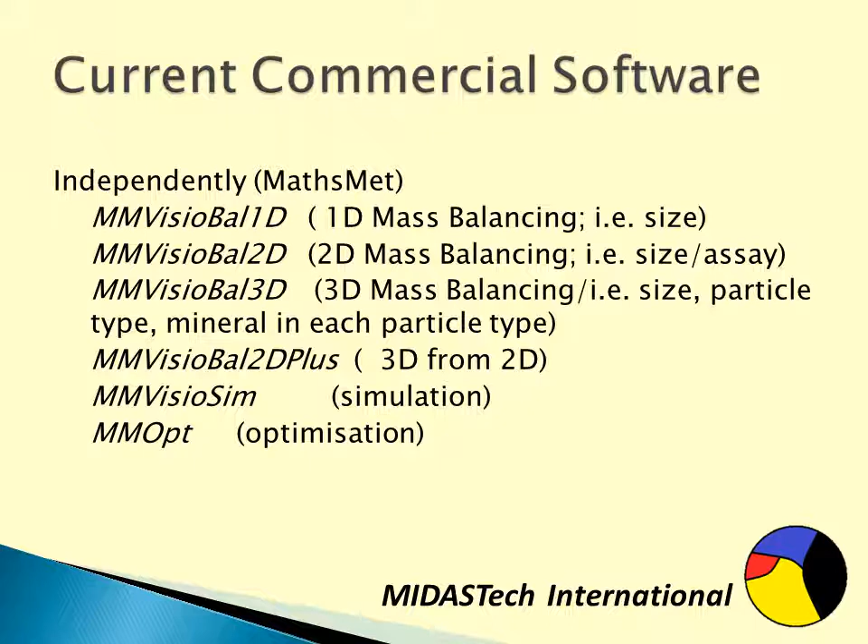And MMVisioSim, which is a simulation system, and there are numerous sub-products which arise from the main products. I do use a Visio flowsheet and interrogate it and put it to an Access database, so that's Visio to Access. And when I use a Visio flowsheet and connect it to Excel, it's Visio to Excel. There's a general flowsheet simulator that we're currently developing in Excel called Excel Sim.

In LinkedIn, you often get the question, and it's generally superficial, what is the best simulator? For which there's often responses which are one-line responses, such as you should use this simulation system or you should use another simulation system. One of my favourite quotes is, you should use such and such because it can do everything. Generally, when I respond to questions like this, I ask people what their requirements are.

What are they trying to achieve? By doing this, I've also come to grips with what I think should be in a simulator. Now, there's lots of criteria for what a simulator should have.

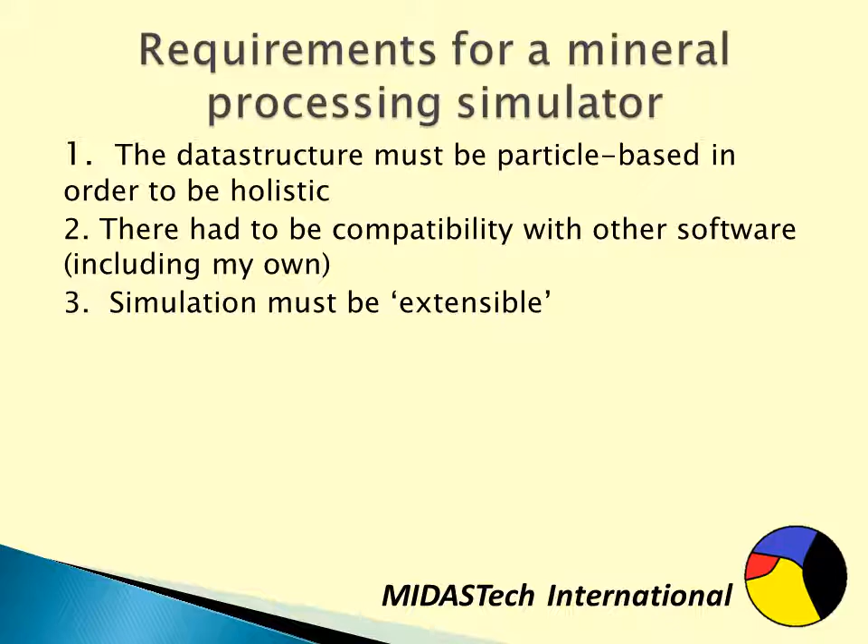And here I indicate what I think are most important if one wants to think of a holistic simulator. The data structure must be particle-based in order to be holistic. There had to be compatibility with other software, including my own. Simulation must be extensible, meaning that users can add their own. One must recognise that simulation is only part of a larger analysis process.

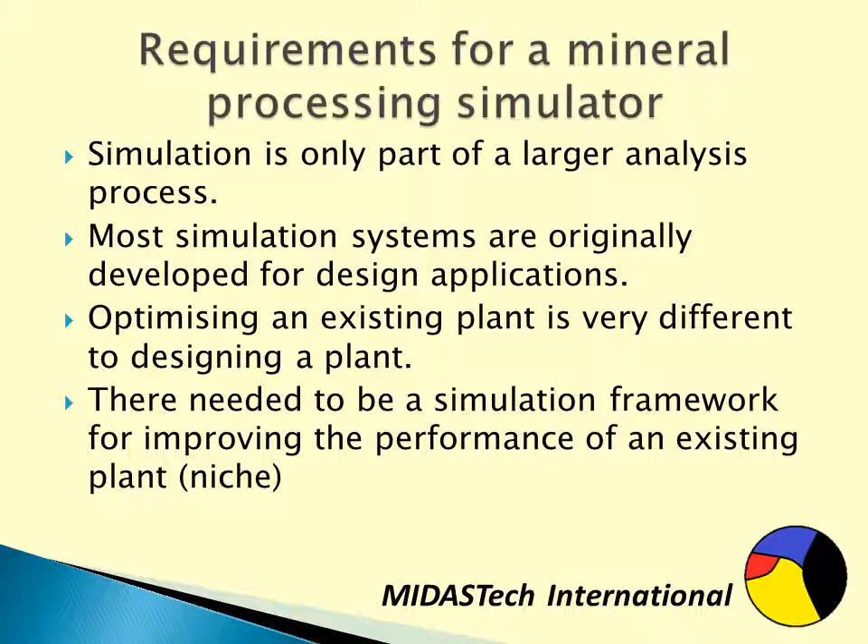Most simulation systems are originally designed for engineering design applications. Optimizing an existing plant is very different from designing a plant, and so there needed to be a simulation framework for improving the performance of an existing plant. And this is the niche market that our company is entering.

I actually did a course in mineral processing, and they run between 5 days or 6 days or 3 days. I've broken it into a fundamentals course and an advanced course. The fundamentals course generally includes knowledge that would be regarded as non-controversial, and in the advanced course I introduce concepts that are effectively way ahead of the status quo.

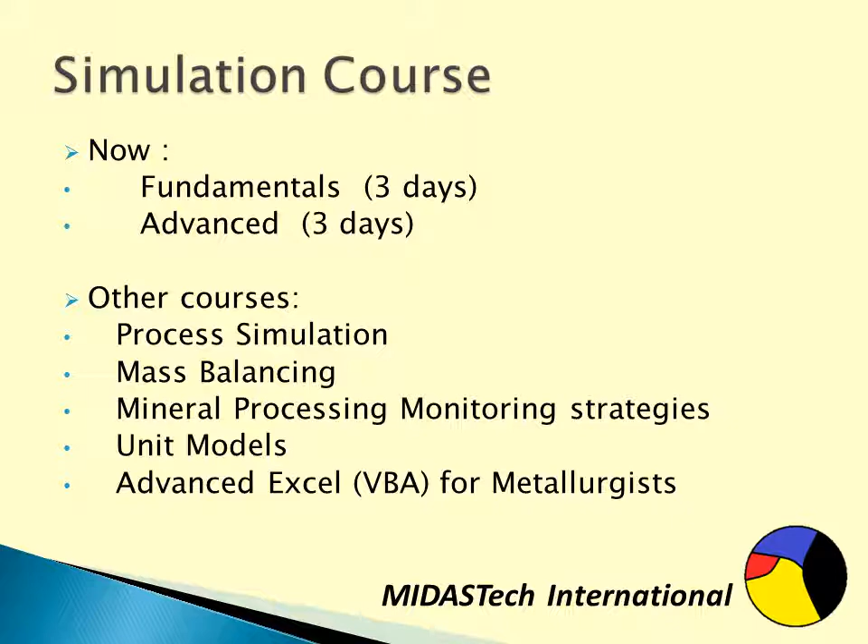There are other courses I give which are derivative courses of the simulation course: process simulation, mass balancing, mineral processing monitoring strategies, unit models, and advanced Excel for metallurgists.

So I've already explained that in order to model a plant holistically, we need to use particles. That's because particles are truly what is being processed by a mineral processing plant. Also, we need to differentiate the ore properties from the unit models.

Hence, the same particle going through the same unit will have the same behaviour. Now, behaviour doesn't mean that if you put it through the same unit once, it goes through the concentrate, and the second time it must go through the concentrate. What it means is that the second time, it has the same probability of going to the concentrate. So we see there is an association between behaviour and probability, and more importantly, a strong connection between mineral processing simulation and probability theory.

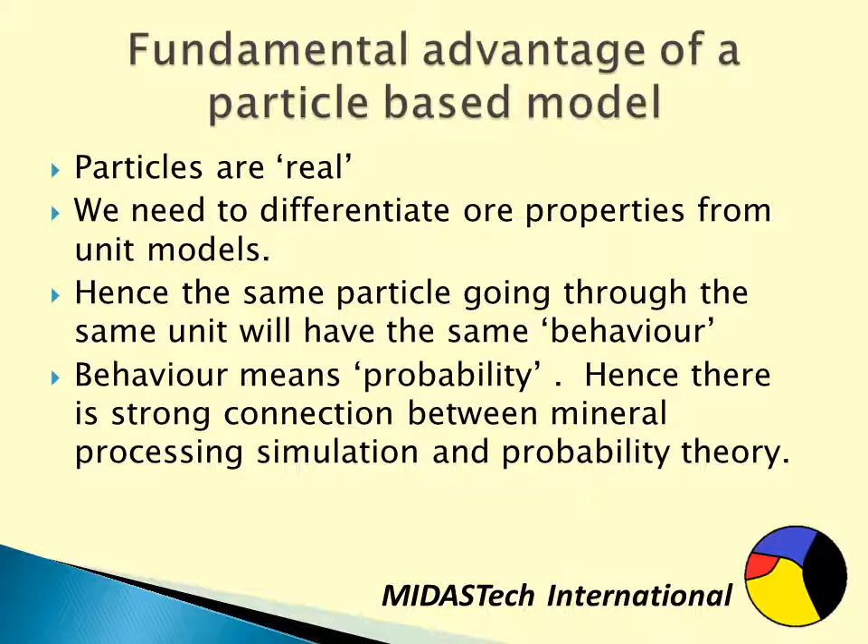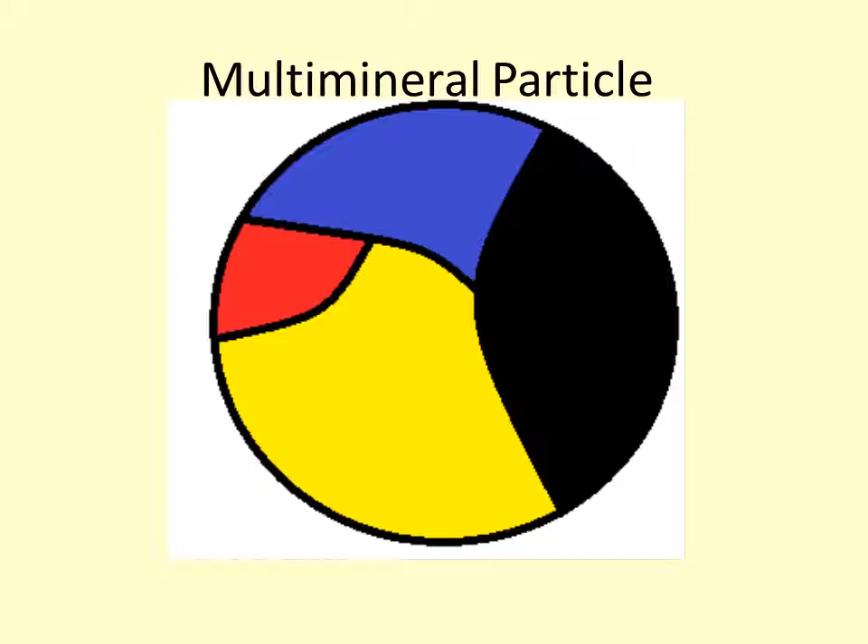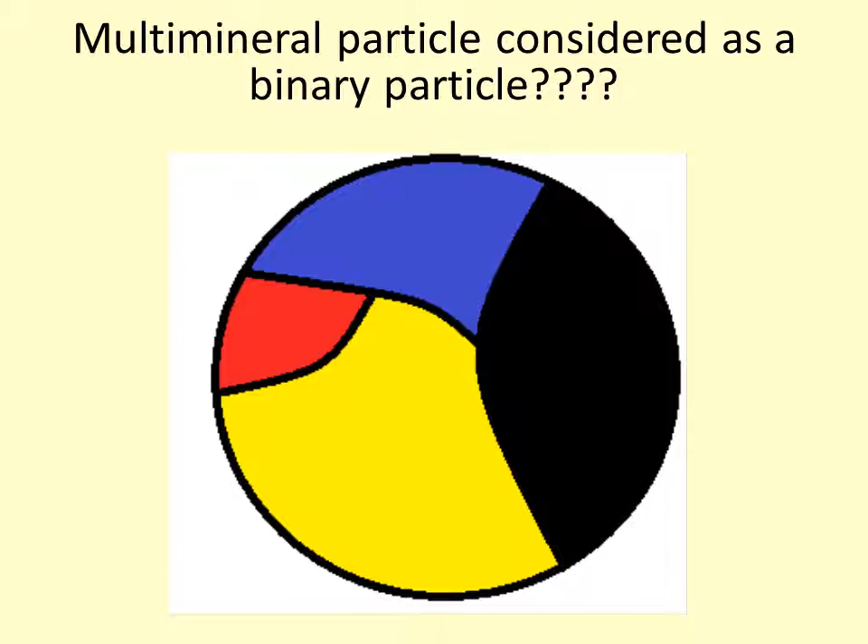So for complex ores, it doesn't seem very sensible to use any other data structure than multi-mineral particles. This is largely where existing mineral processing simulation systems have become stuck, because at best they know how to model binary particles and they don't really know how to treat multi-mineral particles. In the course, I provide the mathematical framework by which the extension to multi-mineral particles is not difficult. It just takes a little bit of time to understand the concept.

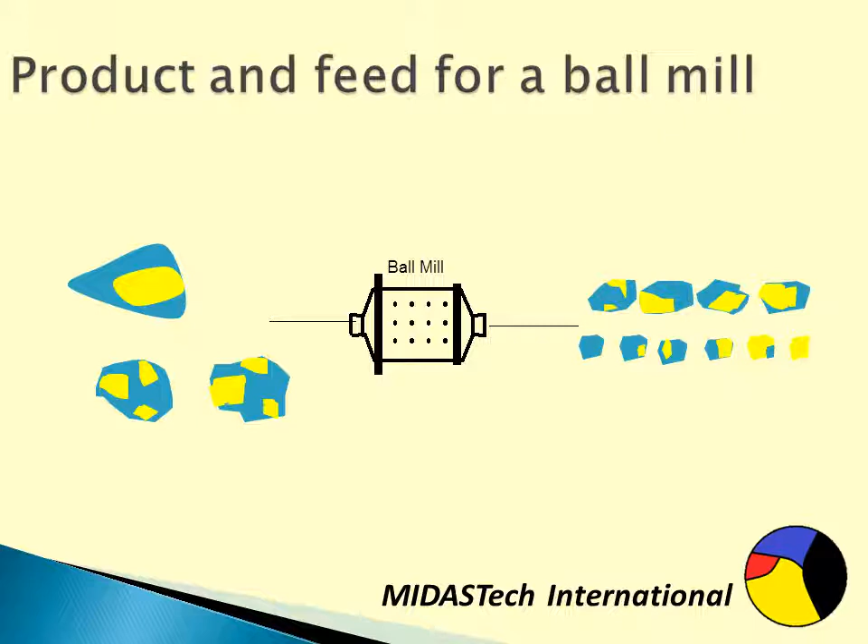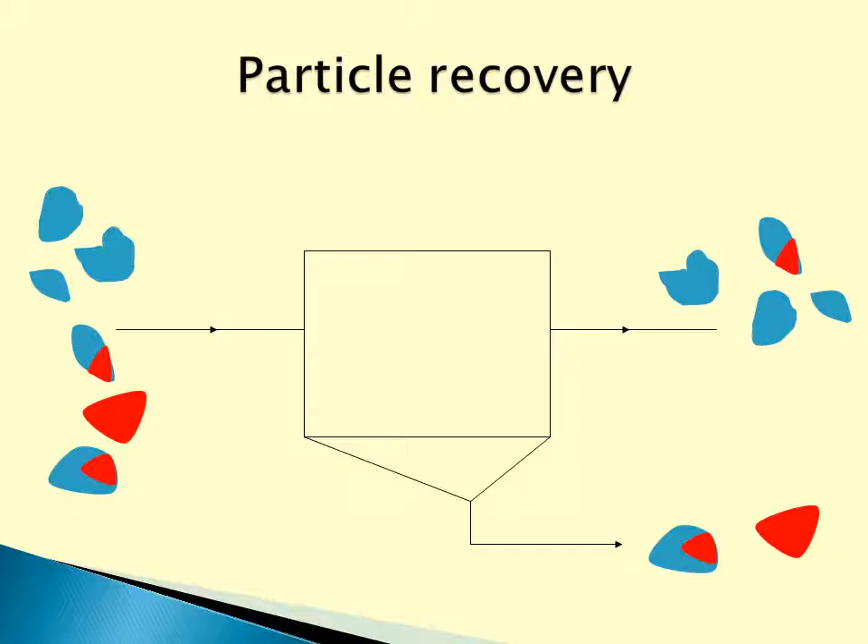I've now explained that probability theory is fundamental to mineral processing. Most engineers are comfortable with the phenomenological type of modelling strategy, which is inclusive of semi-empirical methods. Yet that type of approach is complementary to probability modelling.

Many equations used in mineral processing - comminution, cyclone, flotation - also have a basis in probability theory. Yet probability theory is not taught at appropriate depth to mineral processing engineers, inclusive of chemical engineers and mechanical engineers.

There is generally a poor distinction between statistics and probability theory. I would argue that many mineral processing engineers are not aware that statistical methods and probability methods are not necessarily the same. Of course they're connected, but you can have professional statisticians and professional probabilitists.

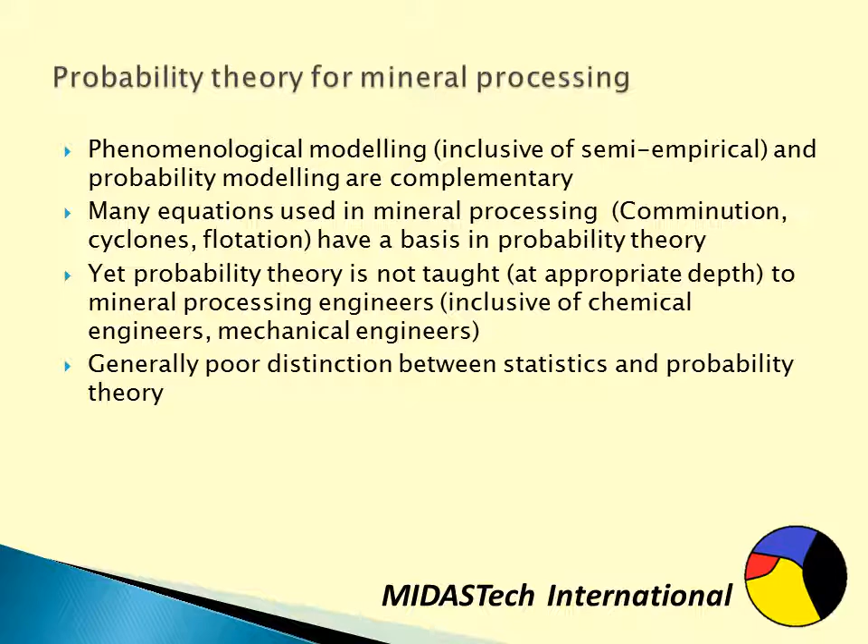We're now just going to go a little bit deeper to understand the difference between a macro process and a microprocess. Because when we're talking about multi-mineral particles, it's quite difficult to measure these throughout the plant. So we have to distinguish the actual process from the observations.

So something that we observe, such as assay, can be considered an observable. A microprocess is a process hidden from the observer that affects the macroprocess. Microprocesses do not have to be measured, but can be inferred from observable variables.

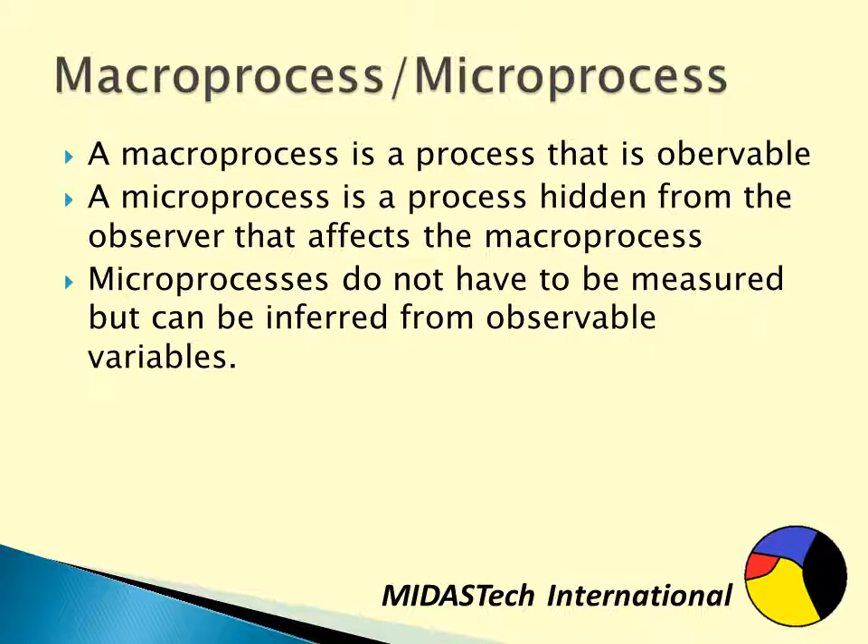Now we're going to go even further back in time, 1904, to one of my favourite applied mathematicians and theoretical physicists, Ludwig Boltzmann. Boltzmann believed in the application of probability theory to theoretical physics, and also believed that atoms formed the fundamental structure of molecules.

But at the time, his theory and the theory of others about atoms was rejected by most physicists. This meant that Ludwig Boltzmann, when he wanted to go to a physics conference in St. Louis, was not invited to present at the physics section. Rather, he was stuck in a section called Applied Mathematics. So here he believed in his methods. 100 years later, they're shown to be valid, yet at the time he was given a lot of resistance.

And yet we look back and laugh at this particular problem of Ludwig Boltzmann. But here we are in mineral processing, over 100 years further than the physicists, and yet we're still not really using the correct data structure.

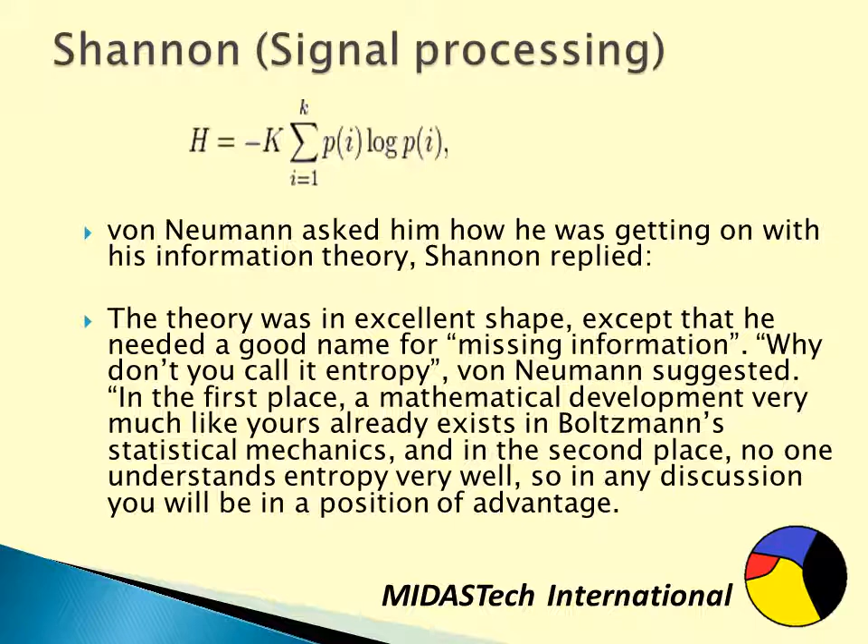However, to understand the entropy methods developed by Shannon, you don't need to understand thermodynamics, statistical mechanics, or quantum mechanics. Many people interested in information theory may in fact spend unrequired energy in understanding the theoretical physics that is the parallel subject area.

Entropy evolved, and in 1951, Kullback and Leibler created the Kullback-Leibler divergence, which basically says that if we have a prior, we can use that prior as our starting point and still use entropy, so that in the absence of any information, the probability function will go to the prior.

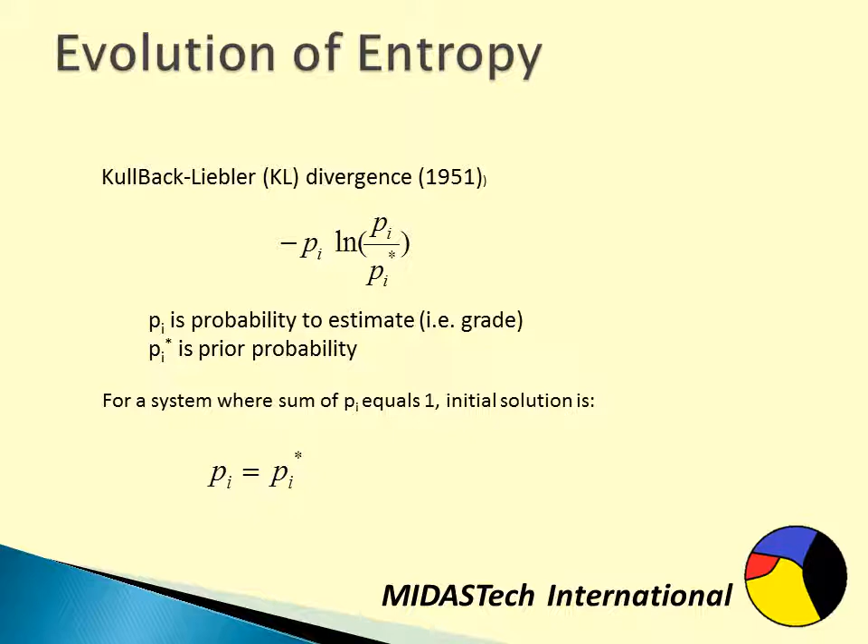The idea of a prior is important to understand because it's not the same as an assumption. A prior is a belief in the absence of information to the contrary, and it's adjustable. The variables are adjusted from their priors to satisfy other known information, such as fixed constraints, mass balance constraints.

In the absence of a prior, there's an interesting concept called an ignorant prior, which is commonly used, for which all variables are given the same value.

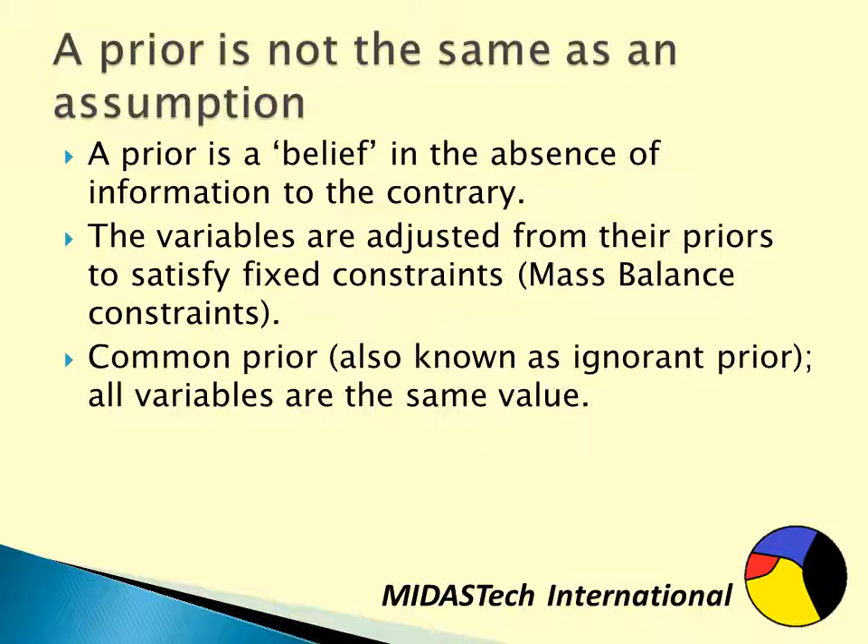We're now going to revisit the 9 steps, and where appropriate, look at it from a probabilistic viewpoint. Step 1 is flow sheeting, which really doesn't have much to do with probability theory.

But many simulation systems create in-house dedicated flowsheet systems, rendering it difficult for users to use other systems. One could argue it's an intentional commercial strategy. This means when a user performs a total simulation, many of the key 9 steps may be omitted.

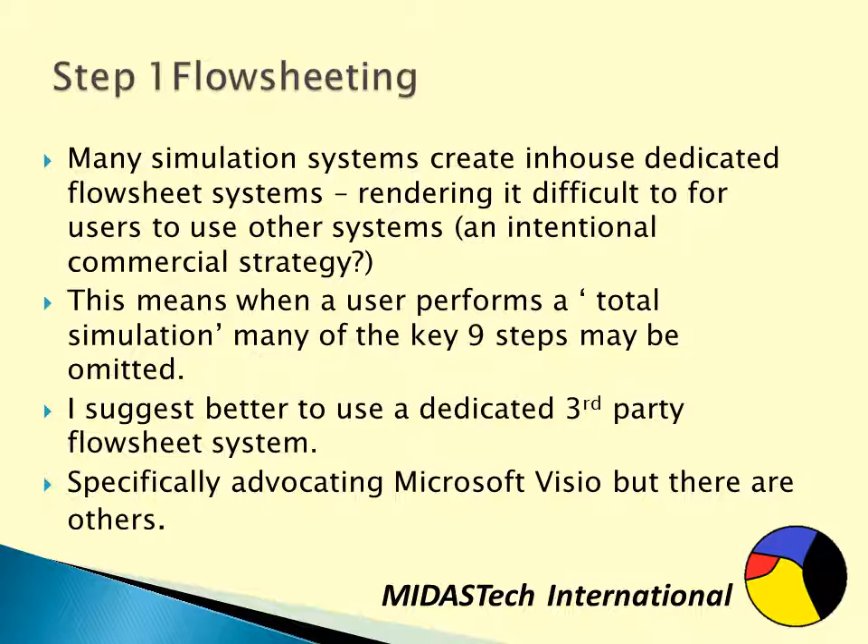So, personally, I would prefer to use a third-party flowsheet system, and I'm specifically advocating Microsoft Visio, but there are other systems available. Microsoft Visio is at least 20 years old, and when I first discovered it, I actually went to the local electrical store, Harvey Norman, and I saw that it cost $45. These days it costs about $500 if you can get it fairly cheaply.

But most mining company professional staff would already have access to Visio through Microsoft Office Professional. What many people don't know is that underneath Visio there's a language, VBA, that allows the flowsheet information to be interrogated. I use Visio, and the icons have been made available by David Wiseman.

Software has been created to interrogate a flowsheet, or any flowsheet, and store information in a database. This software is called Visio Active. And this is an example flowsheet, which is fairly typical.

Step 2, data collection. If a company doesn't collect data, then it might collect limited useful data, excessive data, or collect useful data but isn't analysing it. I have discovered that the major issue most companies would have with the 9 steps that I'm advocating would be this problem of data collection.

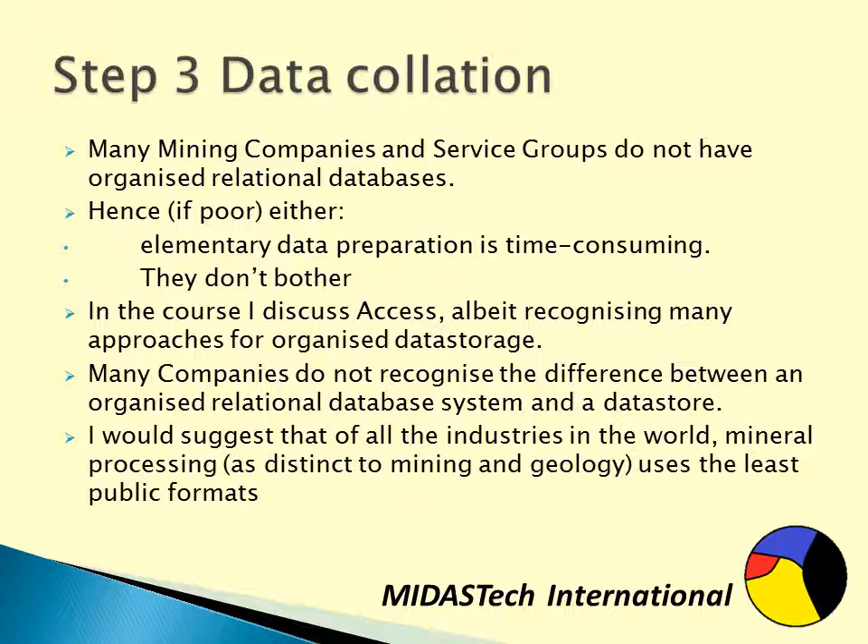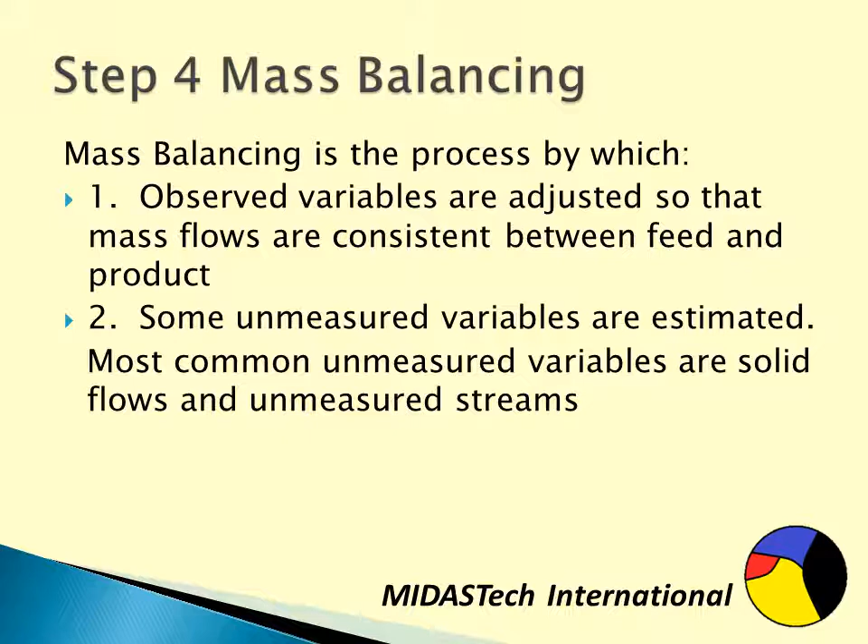Yet the more unmeasured variables we're trying to estimate, the harder it is to actually do. There comes a point where the conventional approaches of mass balancing are no longer applicable. At that level, where we now have lots of unknown variables, those variables can be estimated by what's called plausible inference. So we need to differentiate deductive inference from plausible inference, and we'll discuss that further. In law courts, deductive inference is allowable, not plausible inference. So in plausible inference, there's a fairly high level of uncertainty.

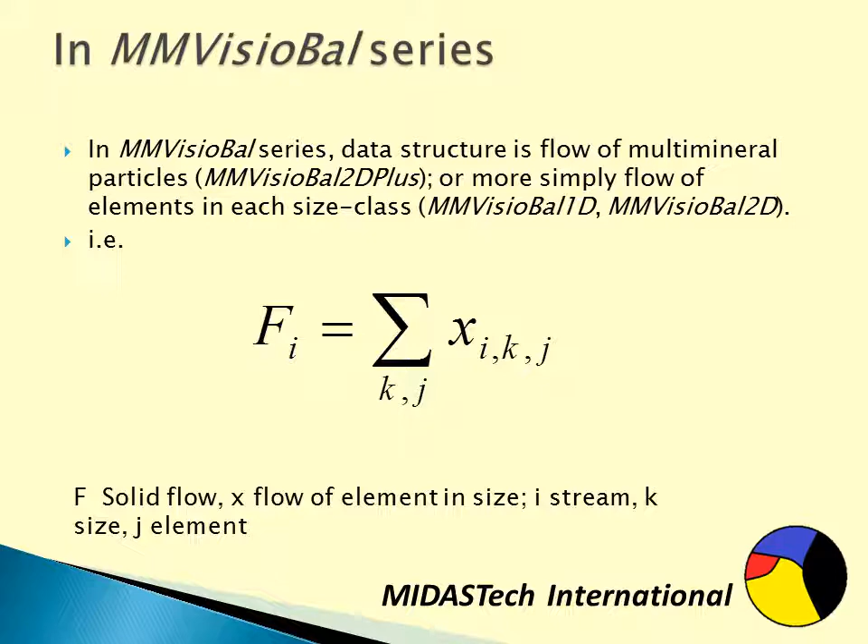In my software, in the mass balancing software, the data structure is the flow of components. So if we know the multimineral particle types, it's the distinct flow of multimineral particles. But if it's not that, it might be the flow of the elements in each size class. This data structure is quite different to classical mass balance systems.

So I actually use an information theory approach. I don't specifically use priors. Information that is known, such as the observation of variables, are regarded as constraints. So in stage 1, I use an information theory approach, and I use the observations as constraints. Of course, some of the observations might be contradictory. So in stage 2, I remove the observation constraint and just let it finish iterating.

And now that's a mass balance where the values have been adjusted. Now, I don't have to use the variances of the observation value. This is a common method used in mineral processing, and in general it's very confusing because the variances are not known, yet they still put them in. However, for those users who wish to use variances, we can still use information theory. A Markov chain Monte Carlo method allows variation of observations to emulate known variances.

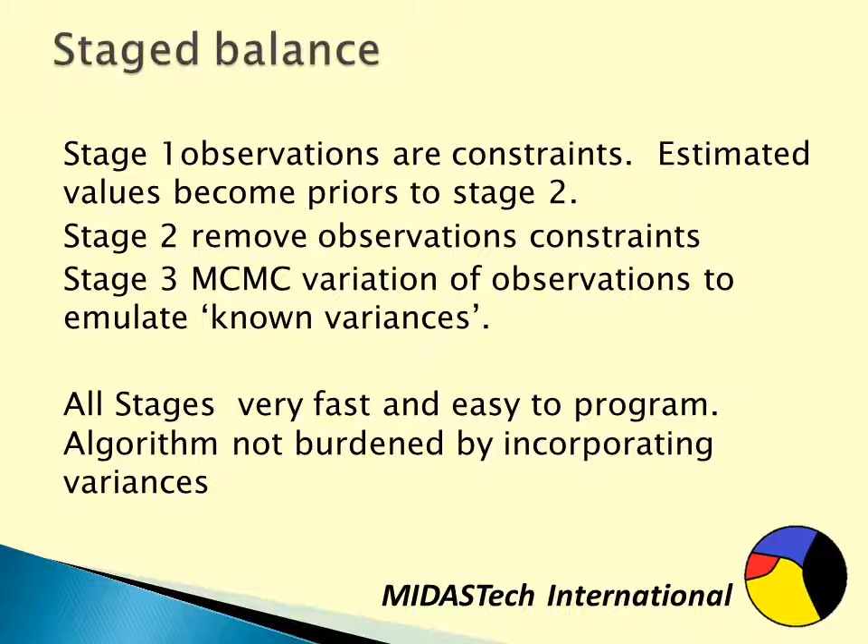This information theory approach means that all stages are very fast and easy to program, and algorithms are not burdened by incorporating variances.

Step 5 is inference, and this is a key step that is being made available through the MIDASTech software. The data structure used in MMVisioBal is a particle-based system rather than variable-based. It turns out that if sizes are measured and bulk assays are measured, MMVisioBal will still estimate the assays within sizes even if they're unmeasured.

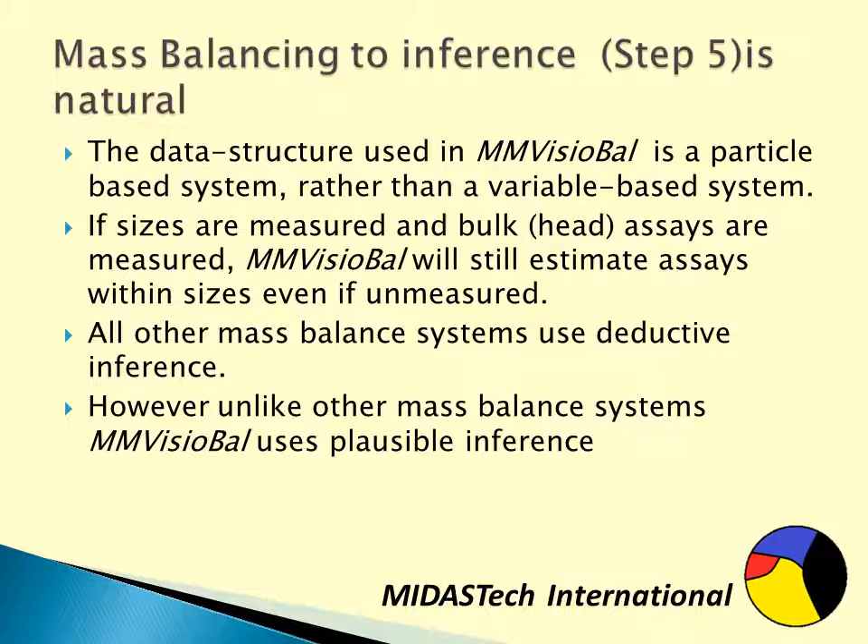All other mass balance systems use deductive inference. This means they cannot estimate the assays within sizes if they're unmeasured. So the distinction between this software and conventional software is that it uses plausible inference.

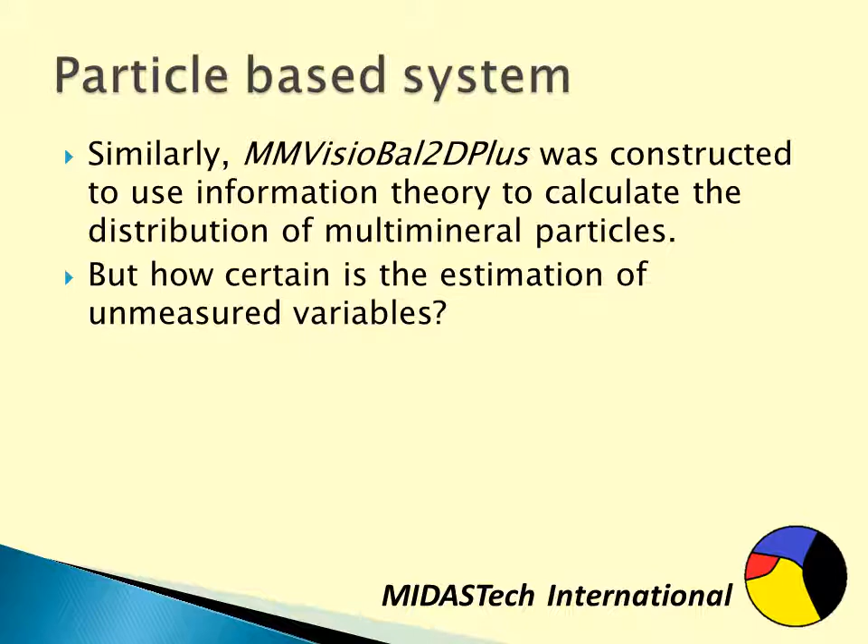MMVisioBal2DPlus does use the multimineral particle distributions, and so it can be used to estimate the distribution of multimineral particles in each stream. The question is, if it's using plausible inference, how certain is the estimation of these unmeasured variables?

So how uncertain are some of these estimated variables? Some of the estimated variables may be so uncertain as to be rendered impractical, and others may be so certain as to be practical. So increased functionality has caused some general uncertainty. For a user, this is discouraging. A user is like the law court and generally does not want high uncertainty.

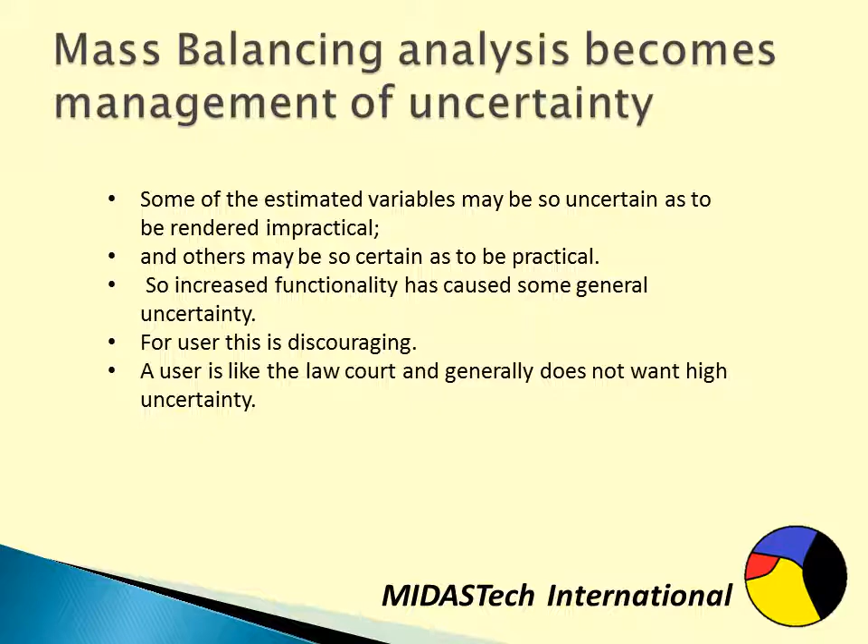And therefore I had to think about methodologies to improve the certainty of these unmeasured variables. And it became obvious that if I used information from different audits, it would provide me with a huge advantage. There's a provisional patent filed on this methodology.

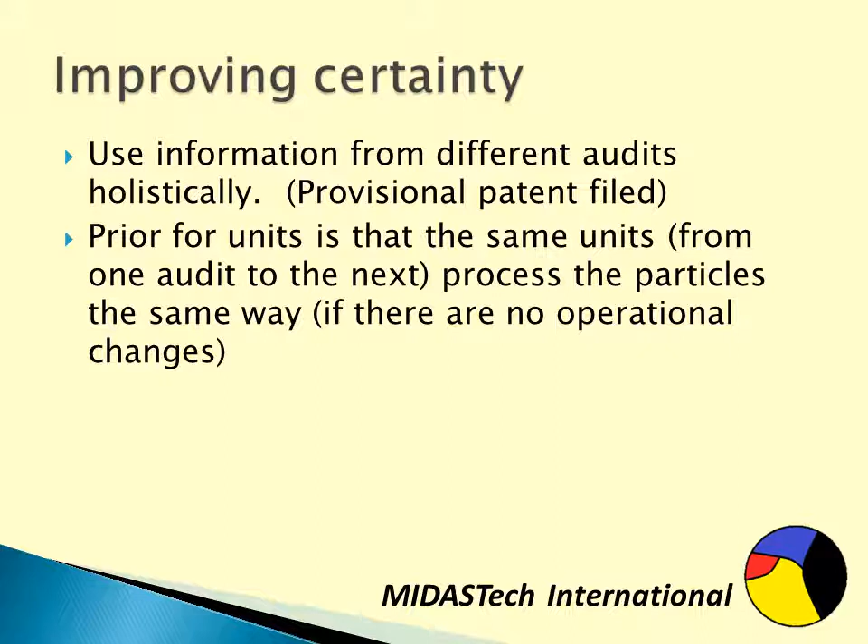The prior for units is that the same units process the particles the same way if there are no operational changes. And if you remember, this was the fundamental concept for why we need to differentiate ore properties from unit properties. There is a surprising benefit to this methodology: because the information from different plant audits of the same plant are now integrated, we need less measurements per audit.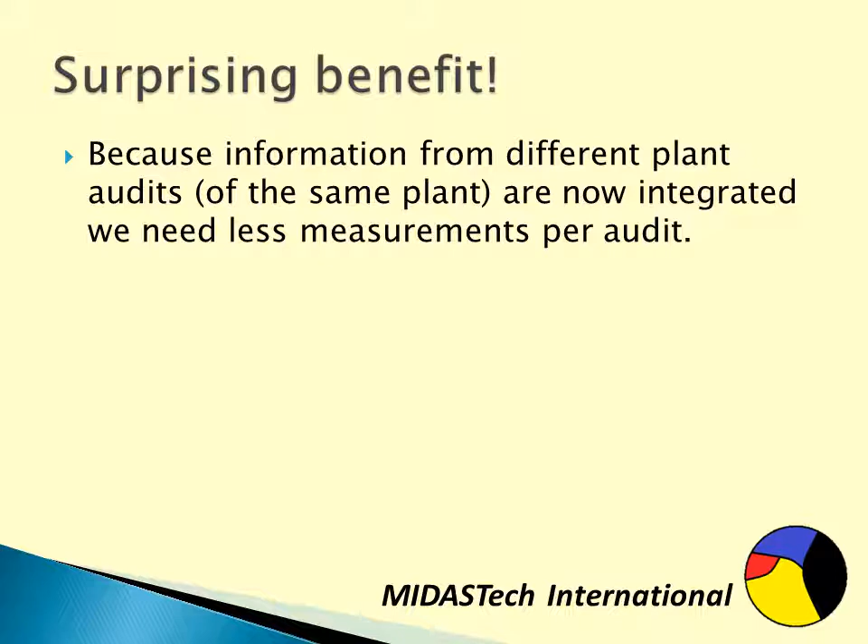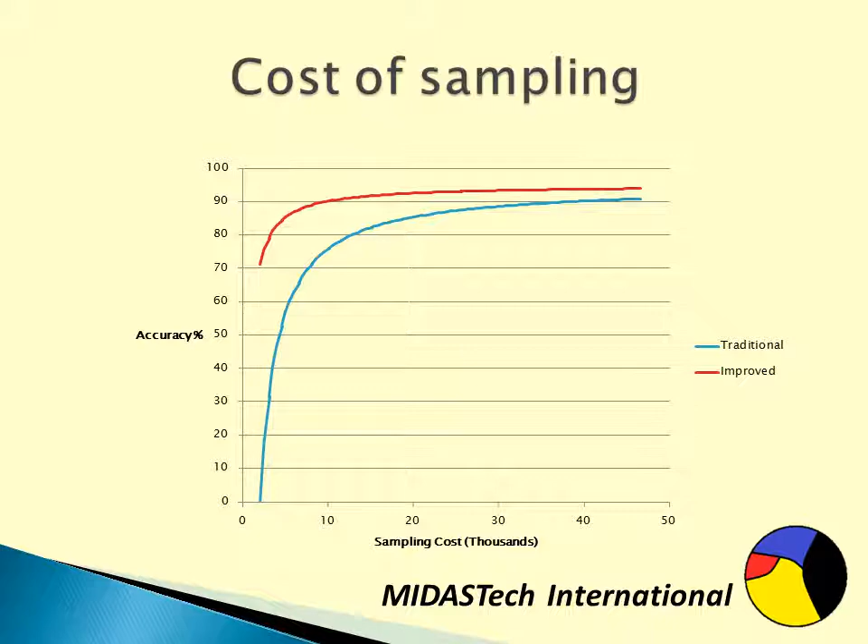I've put forward this idea that the methodologies advocated in this presentation can greatly reduce the cost of sampling. The blue line indicates the traditional approach, and the red line indicates the new approach. For the same cost, we get higher accuracy, or for a given accuracy, we can do it with far less cost.

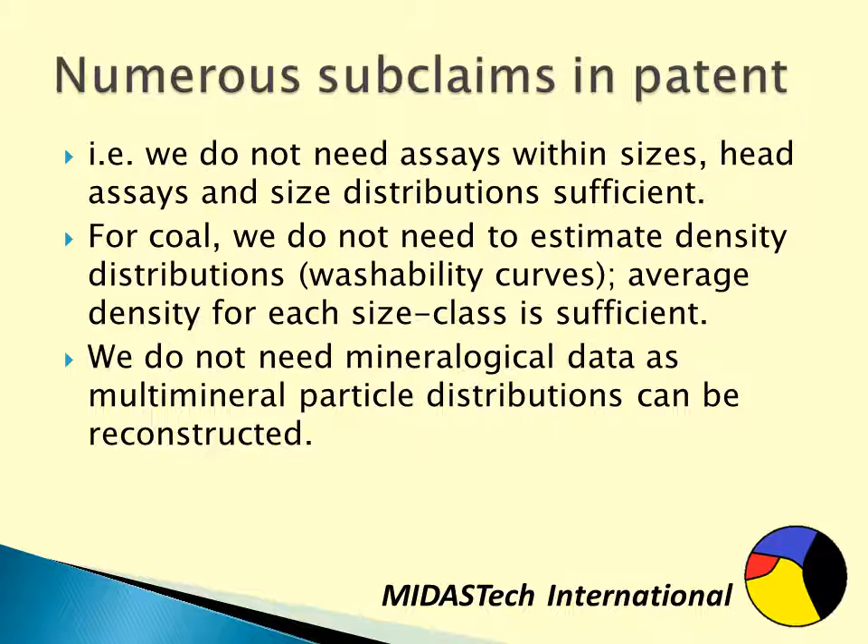There are numerous subclaims in the patent. We do not need assays within sizes, head assays and size distributions are sufficient. For coal, we do not need to estimate density distributions or washability curves. Average density for each size class is sufficient. We do not need mineralogical data, as multimineral particle distributions can be reconstructed.

Does this mean we don't perform detailed sampling? One would say that what I'm saying in this seminar is that we don't need to measure assays at the time, we don't need mineralogy. The answer is both yes and no. Yes, because a detailed sampling campaign may not actually be required. No, because the more measurements, the better. Remember, there is uncertainty, and it allows reduction of uncertainty and better identification of problem units. But what I'm really saying is that this methodology provides a different viewpoint.

Information theory provides the basis for strategic sampling.

Now, there's a lot of mathematical techniques used in this approach. I'm just outlining them here for the sake of those who might have a more research bent. There's Monte Carlo simulation, Markov chain Monte Carlo, and hidden Markov models. They won't be discussed here, however they are discussed in the course.

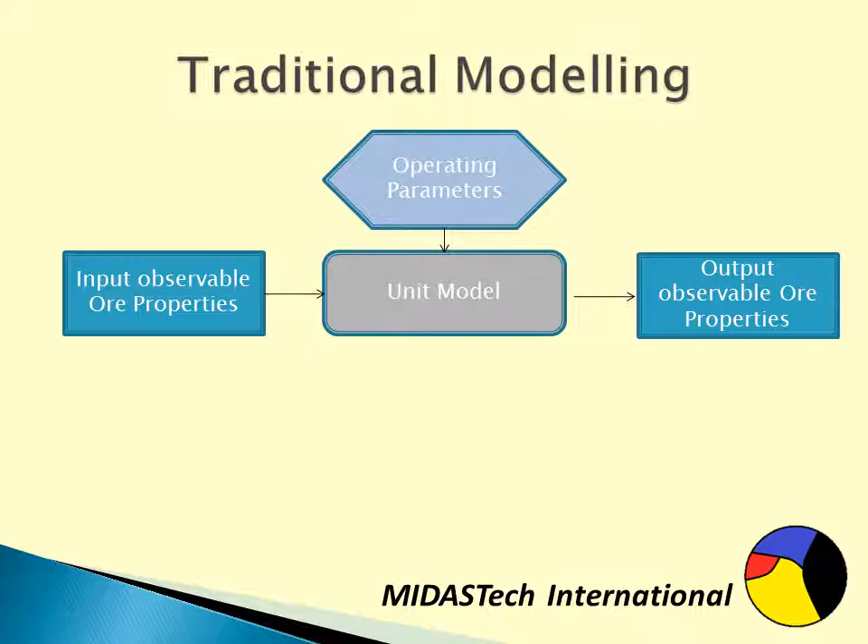In the following diagrams, I wish to just elucidate the methodology. The traditional approach is we have input observable ore properties, operating parameters, a unit model, and from that we estimate our output observable ore properties. And that would be fine if it worked. The trouble is that the actual mineral information is more detailed than those observable ore properties. So the only correct way to do it is to recognize that the ore properties have to be understood in depth. I've called that the input hidden ore property. We now apply that information to the unit model and we get the hidden output ore properties, from which we can get the output observable ore properties, such as grade of mineral and recovery.

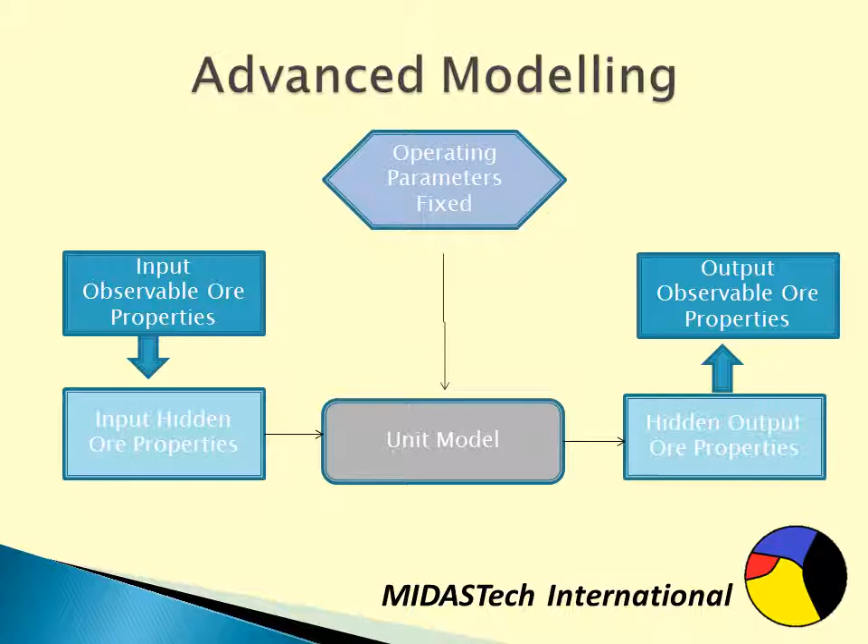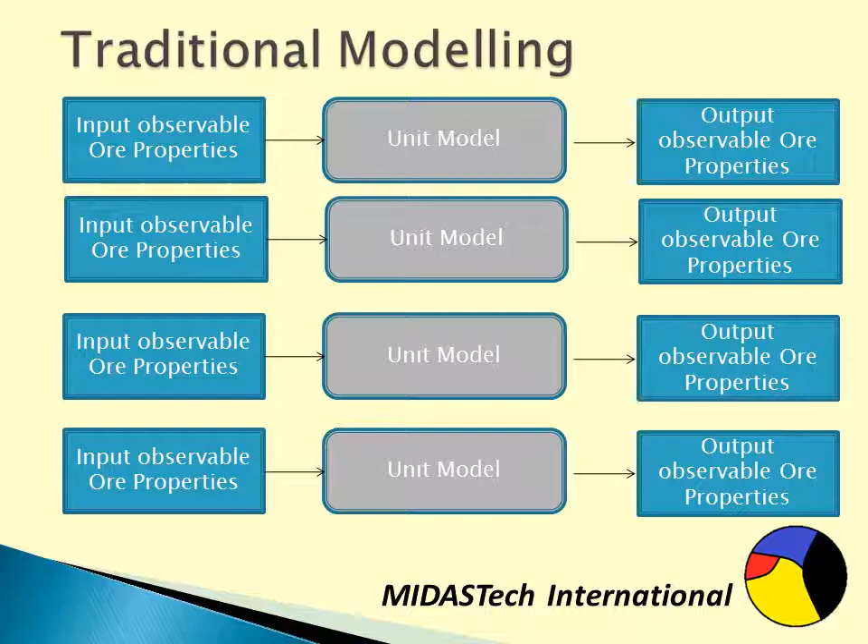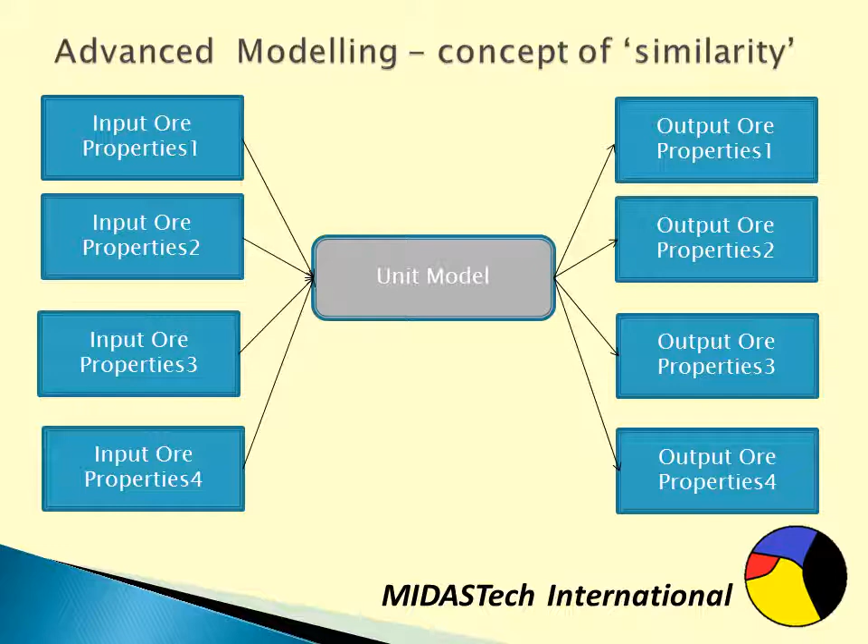Traditional approach, particularly true for laboratory sampling: input observable ore properties goes to, say, a lab test, a flotation test, and we look at the outputs. From that, we work out the properties, the kinetic rates. Another sample, model, set, output, and so forth. I'm arguing that it's far more efficient to realize that they're going into the same particular unit, and therefore the unit model, if correctly identified, is the same for each of the different samples. So we're trying to holistically consider all the data.

Step 6 is to define the operational variables. This is where the seminar and the course gets controversial, because many models don't actually use operating variables. They are indeed very hard to implement practically. This doesn't mean they don't provide insight. But if you actually analyze where we are at with mineral processing modeling, then we're still very far behind from where we should be.

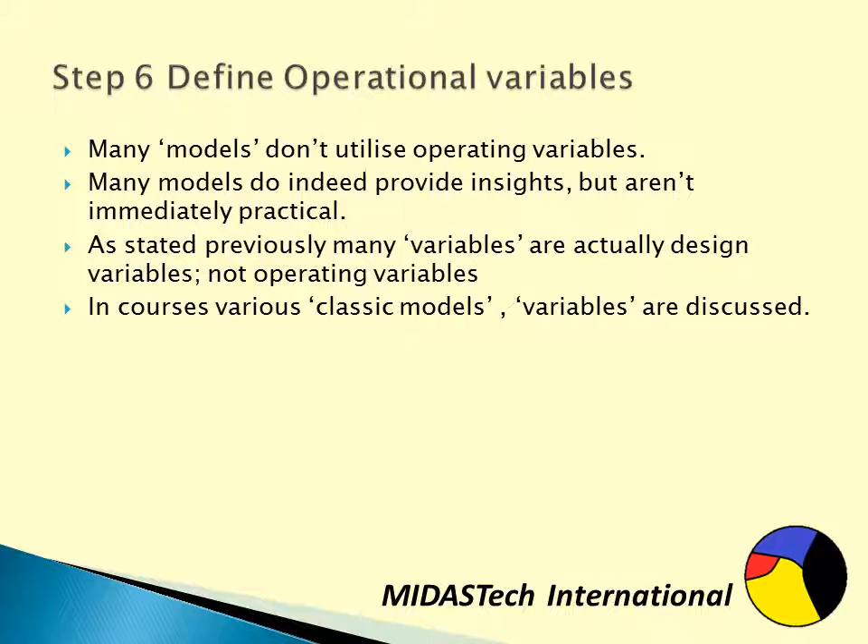Many variables used in simulating the plant are actually design variables rather than operating variables. In the course I give, I discuss the various classic models, and I go into the variables in much greater detail than I do here. It does indeed take about half a day to study.

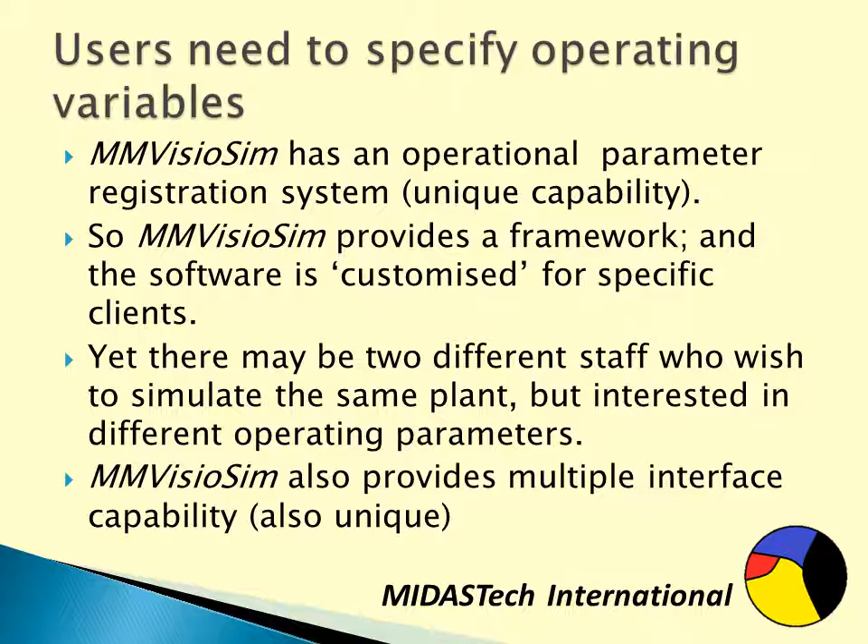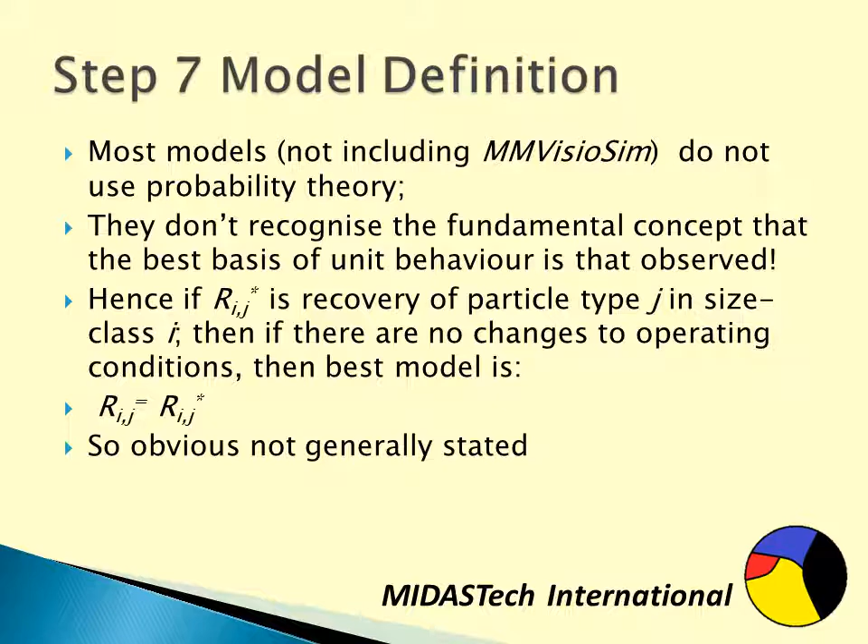So the inference method allows one to identify how units are processing ore at the particle level. Models should be based on predicting changes to unit behavior.

When you think about it this way, you recognize that many of the simulation books in mineral processing need to be rewritten. Because MMVisioBal2DPlus looks at how units process ore, if operators record changes to operational parameters, it is then possible to more easily develop models for unit changes due to operational parameters.

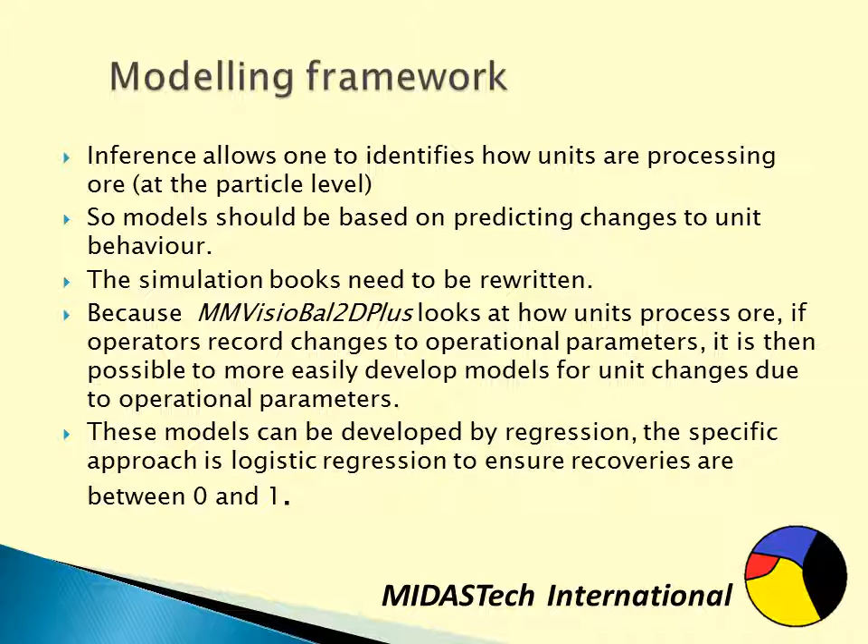These models can be developed by regression. The specific approach I advocate is logistic regression, to ensure recoveries are between 0 and 1, or 100%.

The methods in this presentation therefore advocate using the data to determine the model, rather than using imposed models, because the imposed models generally do not go to the right level of depth, and indeed aren't specifically related to the operational parameters. Hence, the method advocated here is logistic regression, which in itself is a form of machine learning.

Machine learning has a particular definition, but what I want you to focus on is that machine learning is based on learning from data, rather than following an explicitly programmed instruction.

I'd also like to emphasize that the software, the simulation system, can use and will use models which are already available. However, when there is a lot of data, a data-driven model structure is preferred. Hence, the approach of using logistic regression is a form of machine learning.

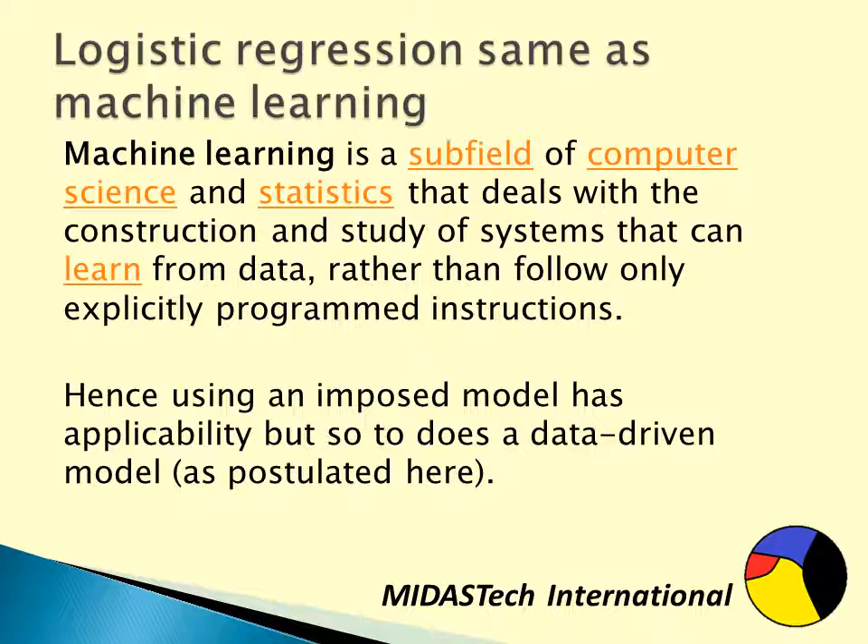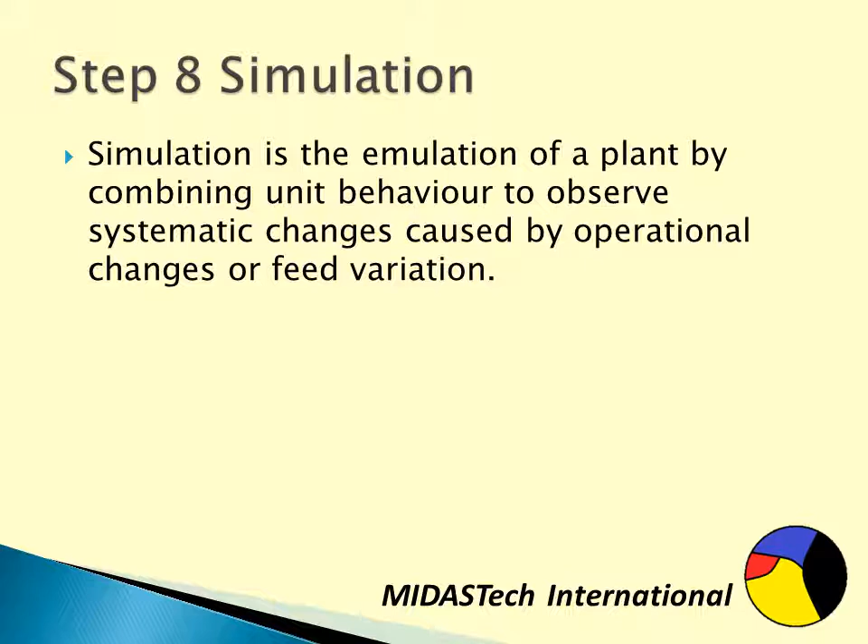Simulation is therefore just step 8. It's the emulation of a plant by combining unit behavior to observe systematic changes caused by operational changes or feed variation.

Again, different users may want to use different models, and again, the simulation system will support this ability for people to look at the same data differently.

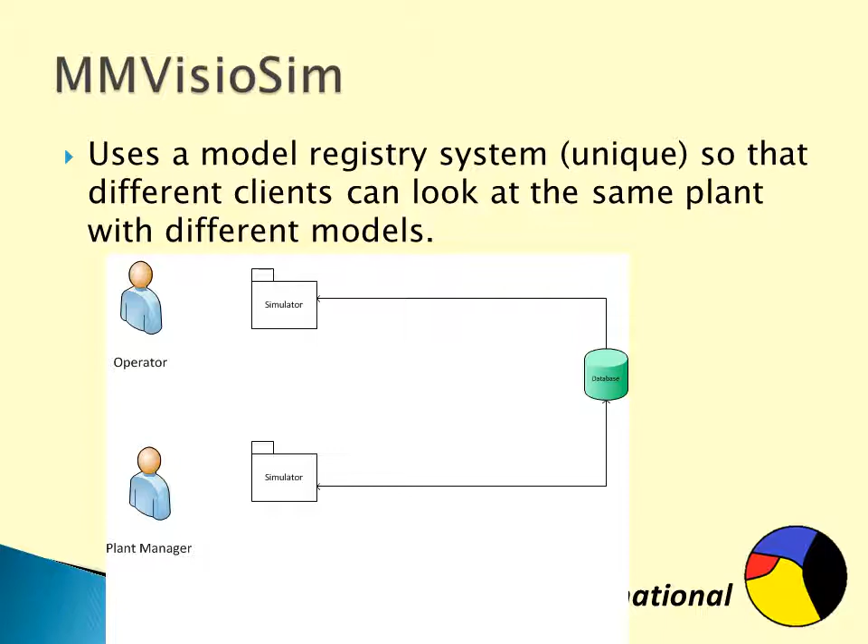Step 9 is optimization. Engineers like to optimize a plant, but it is an overused term. In operations research, optimization means find the maximum value of the target variable, given certain constraints.

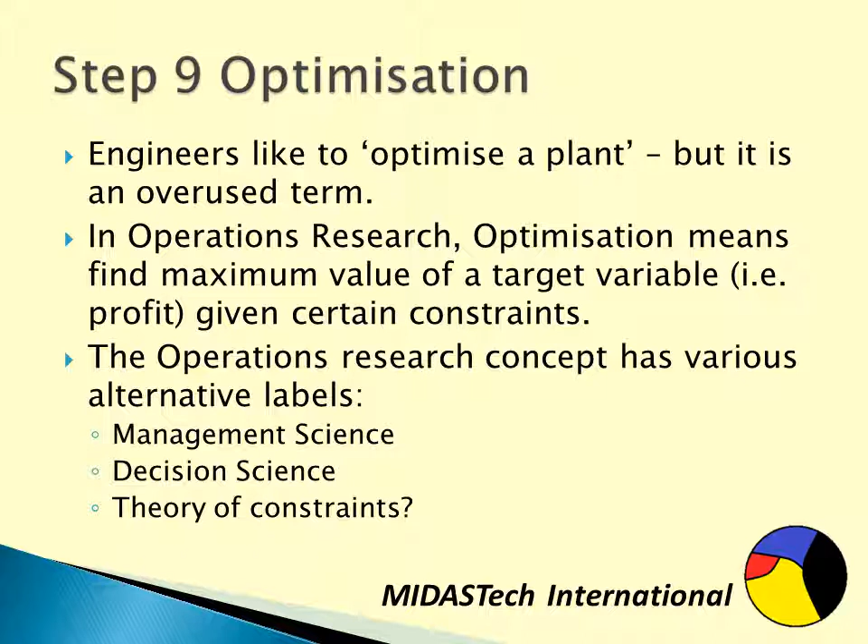The operations research concept has various alternative labels: management science, decision science, and lately theory of constraints, which seems to have become popular in medicine.

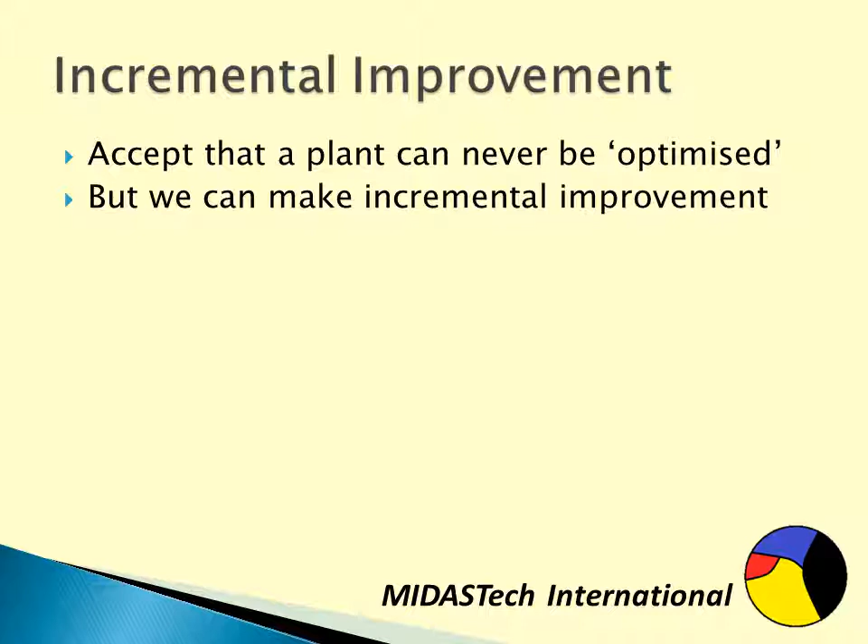But if we accept that at any snapshot in time we can't optimize a plant, because there's always uncertainty and hidden variables, we can, however, make incremental improvements.

So in this slide, I wish to compare the incremental improvement approach versus the single detailed sampling approach. You might have a maximum profit increase of, say, 5%, and the detailed sampling will certainly improve your profit.

So if someone says detailed sampling has in fact increased the profitability of the plant, no argument here. But I'm suggesting that for a much less technical cost, you could have incrementally improved the plant.

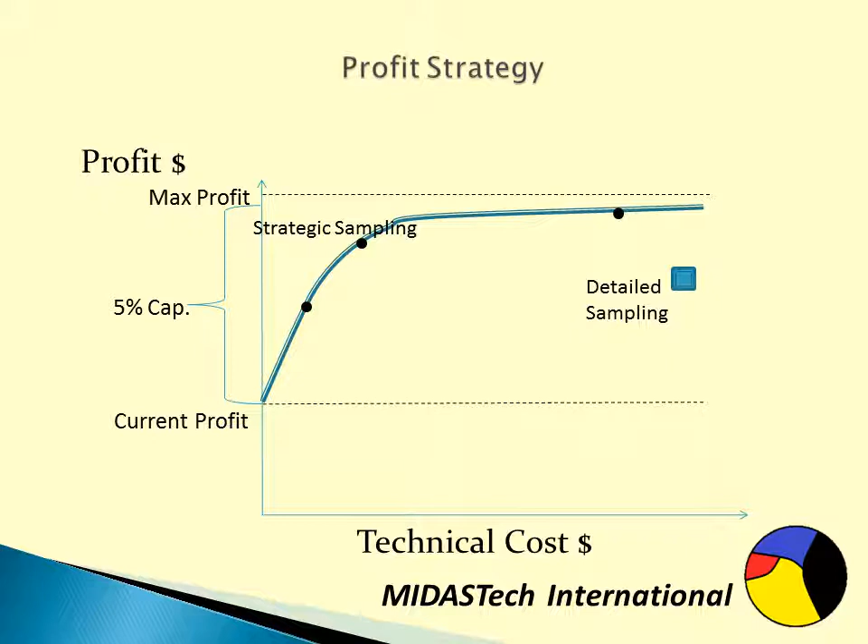Maybe not as well as you could have done by detailed sampling, but then you can do a second sampling strategy, and then a third. In the long term, the advantage of a strategic sampling method versus a detailed sampling method is that you'll get much closer to that optimum profit.

And of course, there's a time advantage to this approach. If you're actually monitoring a plant monthly, daily, or hourly, this is going to be a lot more advantageous if you can make those changes over those time frames rather than in a once-a-year campaign.

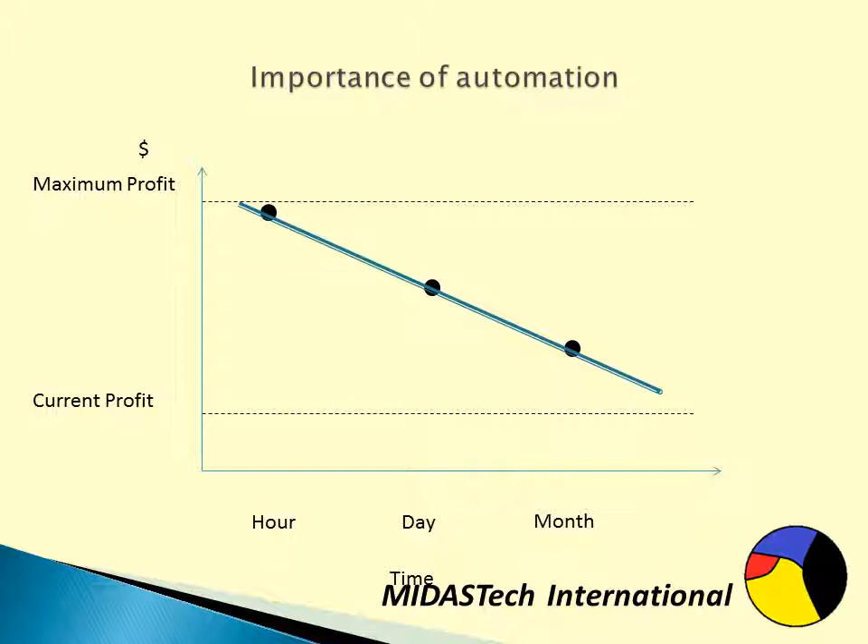That concludes what I'm going to discuss about the general process. I'm just going to focus on inference, which is the niche capability of MathsMet.

In the actual course I give numerous examples of inference and how it's a benefit. In this particular presentation, I'm giving one example only.

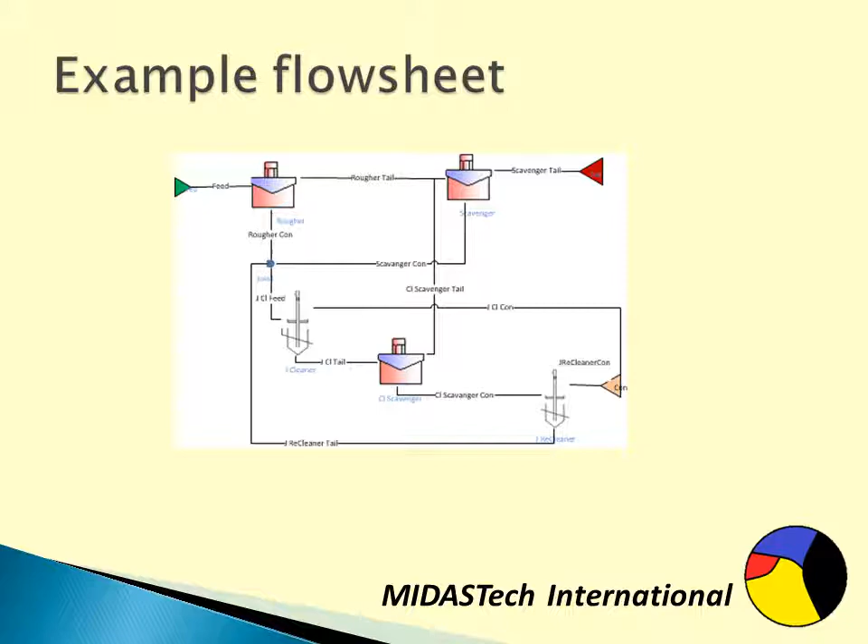My long-term objective is to validate inference for an entire flotation circuit, but in this talk I just show the method for one flotation cell. The circuit I'm working on is that presented earlier, and I'm focusing just on the rougher concentrate. The validation is largely schematic.

It is a real feed and real MLA data, but I don't have full access to the company data. I take a feed and intentionally adjust it by increasing the respective concentrations of minerals of interest - chalcopyrite, pyrite, bornite - to create 6 different feeds.

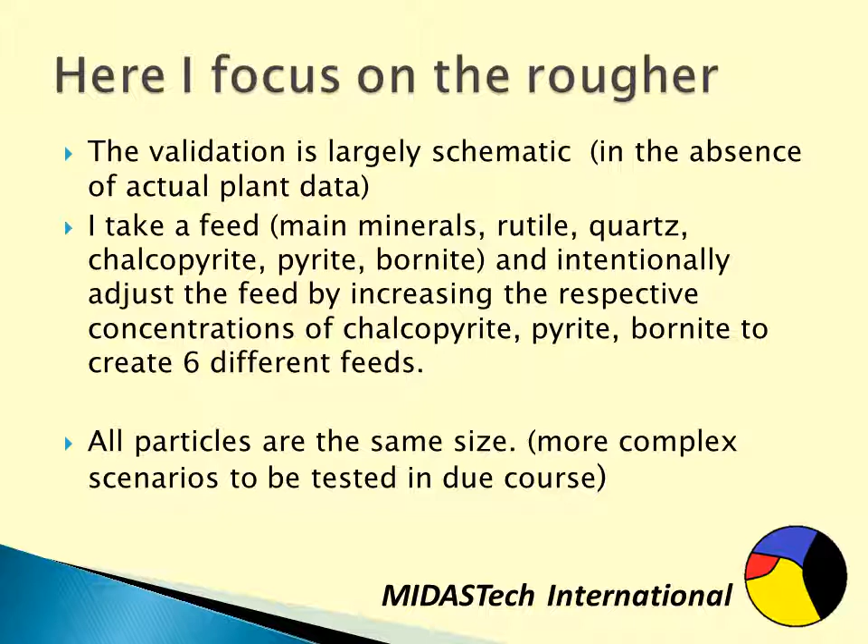For simplicity, all particles are the same size, and I'll be doing more complex scenarios in future. I take actual MLA data and create 40 particle classes.

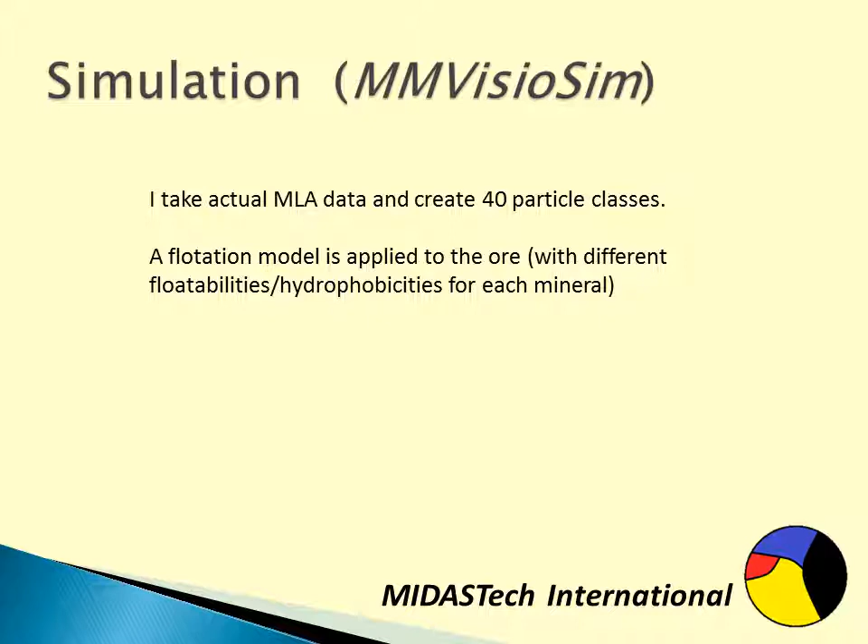So even though I might have 5,000 particle sections, it doesn't mean you simulate 5,000 particle sections - you only need particle types. So I have 4 particle types, 40 particle classes. A flotation model is applied to the ore with different floatability and hydrophobicities.

So in the simulation, I create the rougher con and the rougher tail, and now I want to back calculate what that flotation model was by using the feed particle distributions and the solid flows only in the con and tail. The back calculation procedure knows nothing about the flotation model.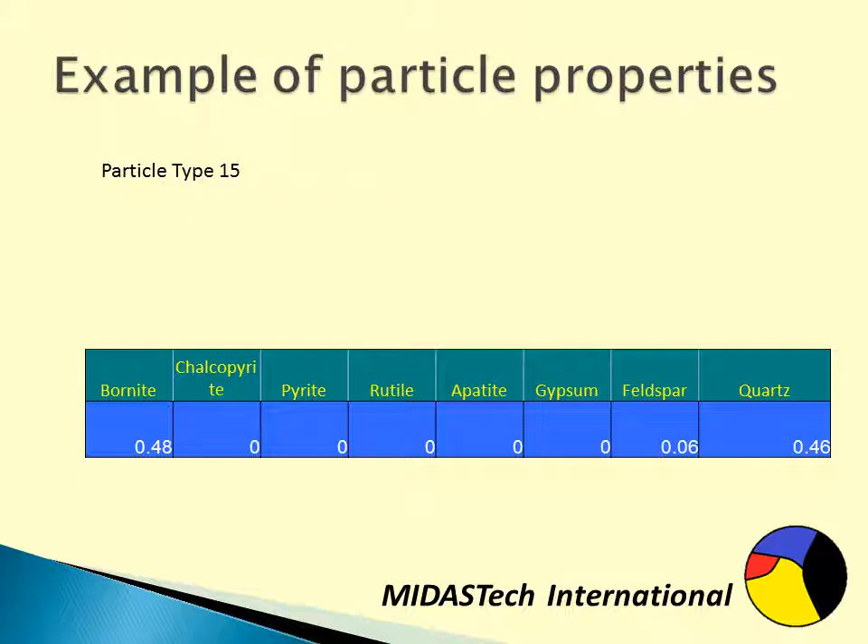The methodology of back calculation - well, I start with an ignorant prior. The probability a particle will go to the con is a half.

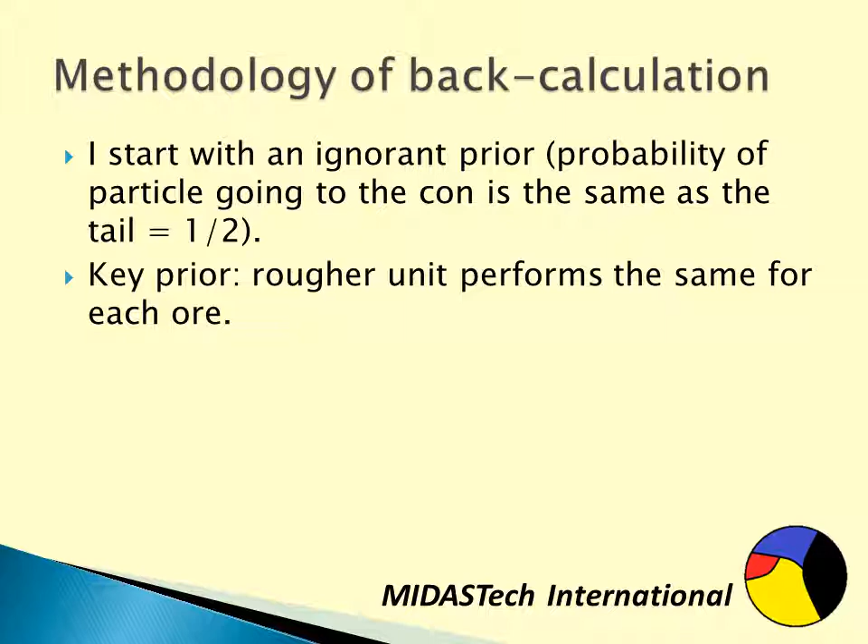But I'm presuming that the model for each of the different feeds for the rougher is the same. So I adjust the prior for each one so that the con solid flows are satisfied.

I then take an average of the partition curve over these particular audits. A direct average will not develop any shape. The averaging is weighted by the respective feed, and there's mathematical reasons why one has to do that.

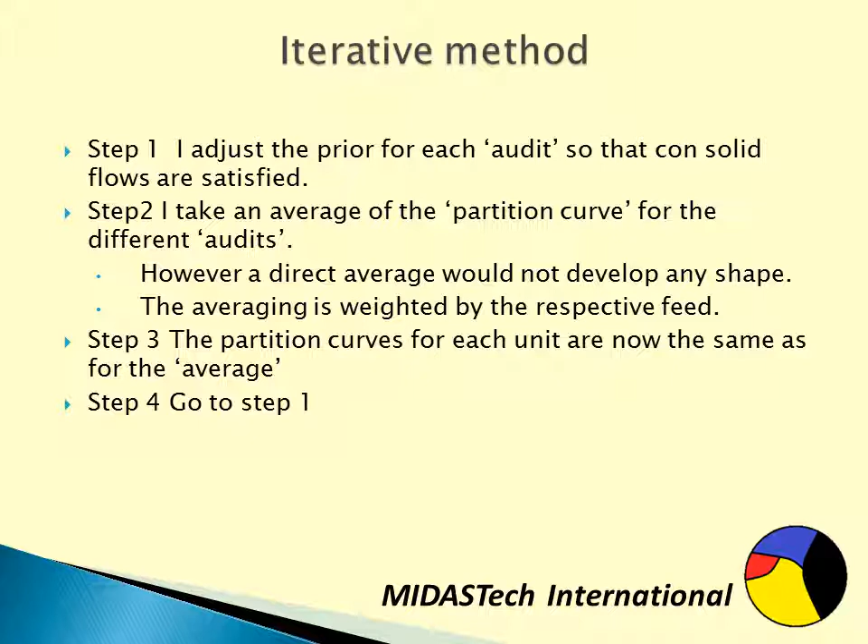If I only did one iteration, the results are terrible - there is no discernment of the partition curve at all. But if I use many iterations, a smart algorithm is used to make sure it iterates efficiently. And in less than 1 second of CPU time, although actually many iterations, we get it.

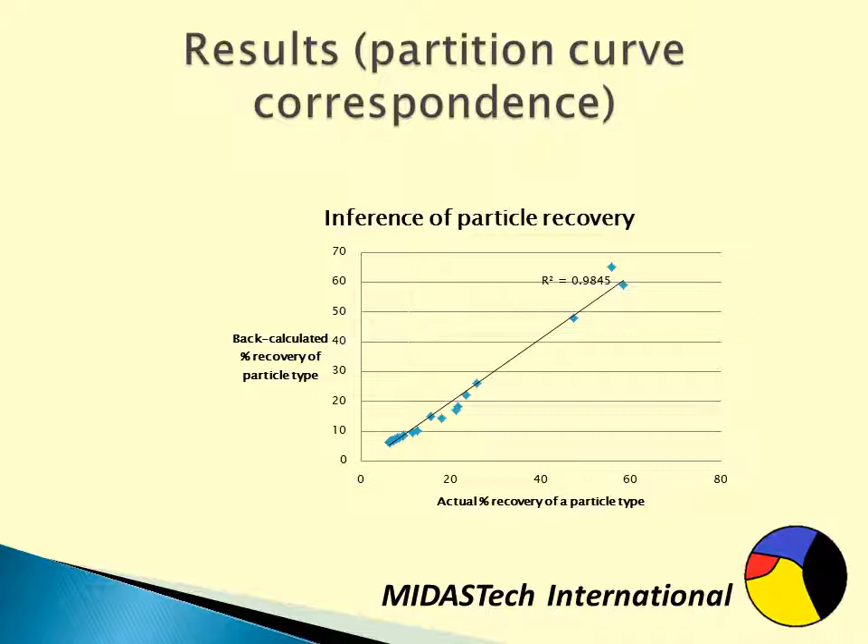And here we see the back calculated recovery of each particle type versus the actual recovery of each particle type. And the correlation is about 99%.

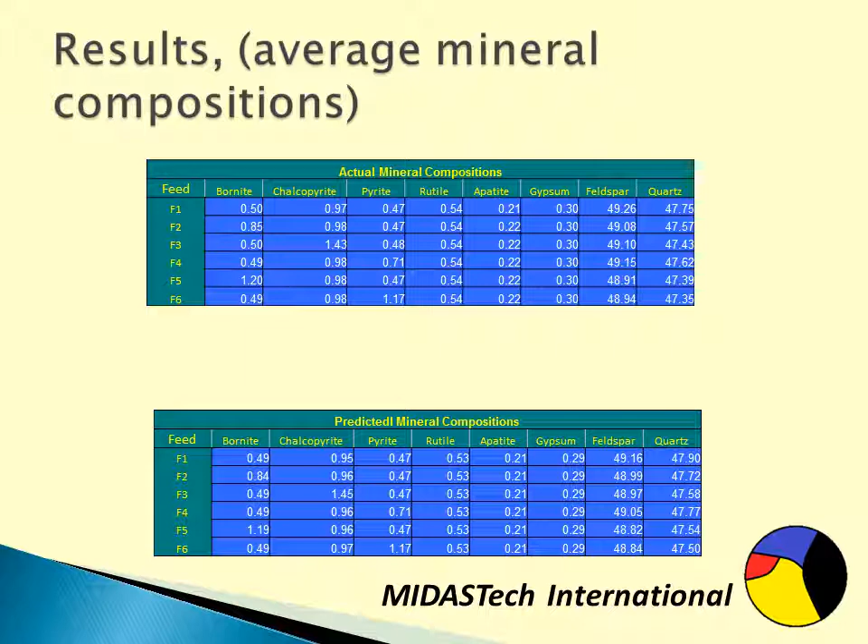And here we see - remember, I didn't use the mineral compositions of the cons - here we see what's actually the actual compositions of the various minerals versus the predicted mineral composition. And you can see, again, the correspondence is very high, probably about 99%.